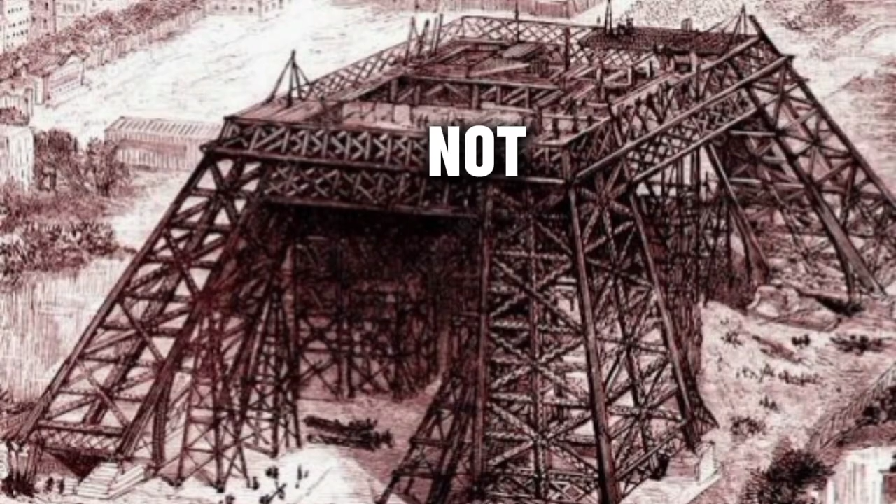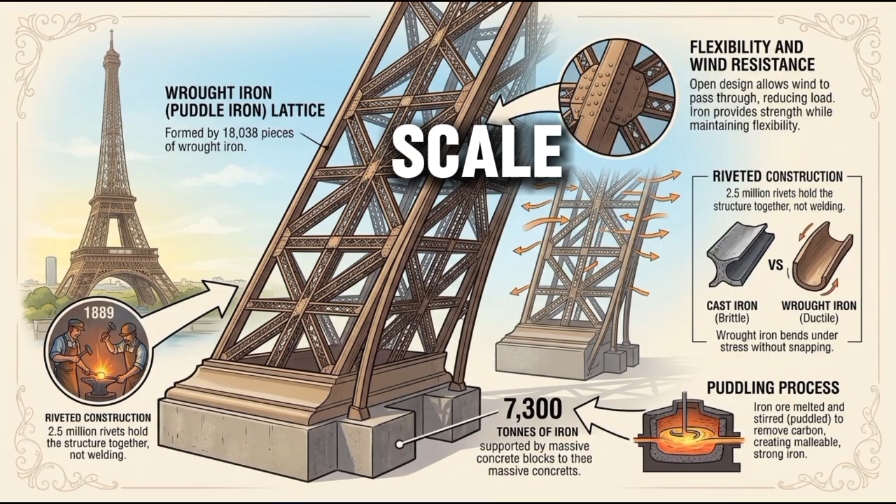On February 19, 2024, the Eiffel Tower closed its gates in the middle of Paris, not because the wind was too strong, not because an elevator had failed, and not because the structure itself had suddenly become unsafe. Employees were on strike, raising concerns about the tower's maintenance and the scale of investment needed to preserve it. Reports at the time pointed to visible rust and a renovation program worth hundreds of millions of euros. The tower reopened 6 days later.

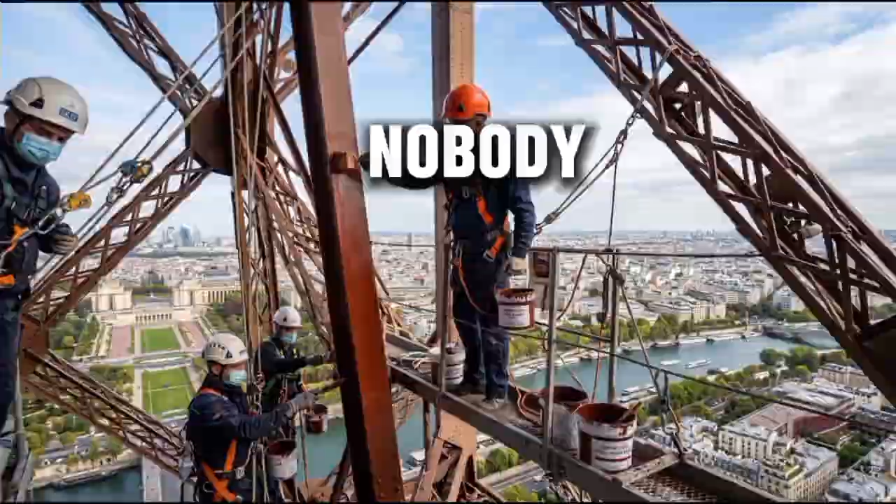Nobody was hurt. But the argument exposed something that photographs never show. The Eiffel Tower is protected by paint, inspection, and constant repair. Remove that cycle, and the iron beneath is vulnerable to corrosion. This is the Eiffel Tower. And here's what nobody tells you about how it's still standing.

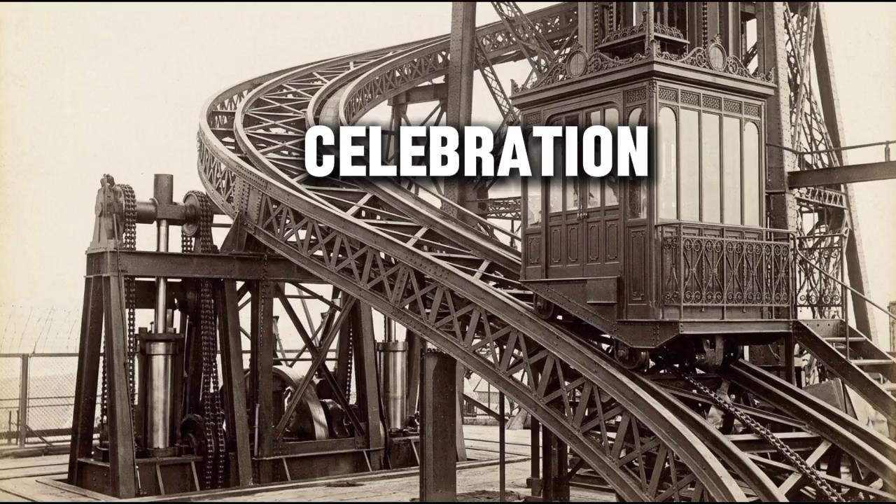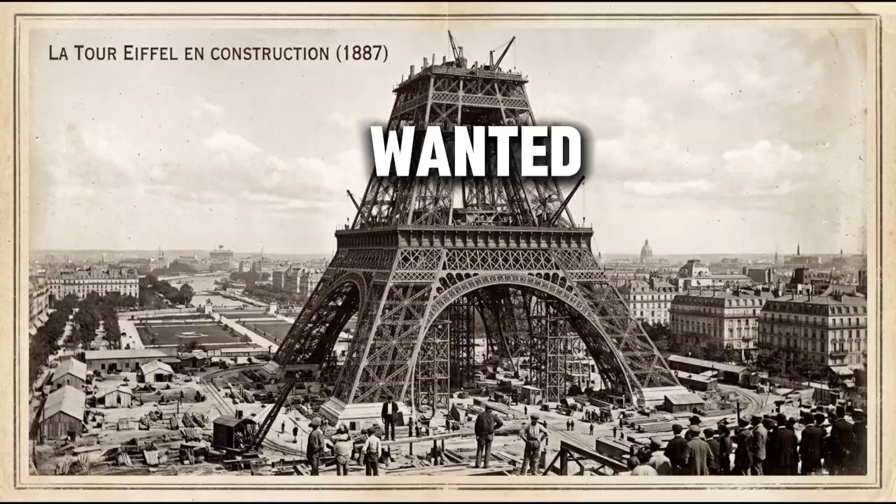The reason this structure exists begins with a celebration. Paris was preparing for the Exposition Universelle of 1889, a world's fair designed to mark the centenary of the French Revolution and demonstrate France's industrial strength. The city wanted an entrance that would dominate the exhibition and make a very specific statement to the rest of the world. France could build bigger.

The project was awarded to Gustave Eiffel and his company, with the design work involving engineers Maurice Koechlin and Émile Nouguier and architect Stephen Sauvestre. The brief was simple to describe and difficult to execute. Build a 300-meter iron tower on the Champ de Mars. The agreement signed in January 1887 gave Eiffel the right to construct and operate the tower, with a government subsidy of 1.5 million francs toward an estimated cost of 6.5 million francs.

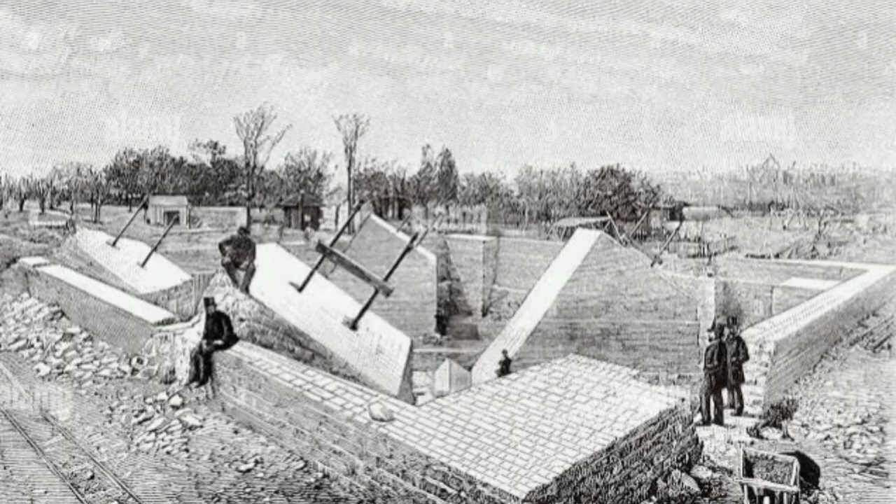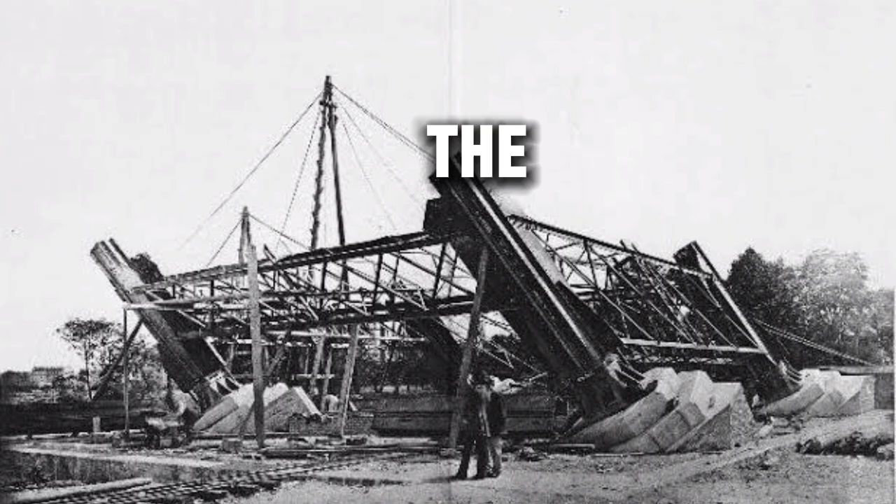The tower was controversial before the first major pieces were assembled. A group of prominent artists and intellectuals signed an open letter objecting to the project, arguing that the proposed structure would dominate the historic character of Paris. But construction continued. Work began on January 28, 1887. Just over 2 years later, the tower was ready. On March 31, 1889, Gustave Eiffel climbed to the top and raised the French flag. The structure that had been criticized as temporary was suddenly the tallest man-made structure in the world.

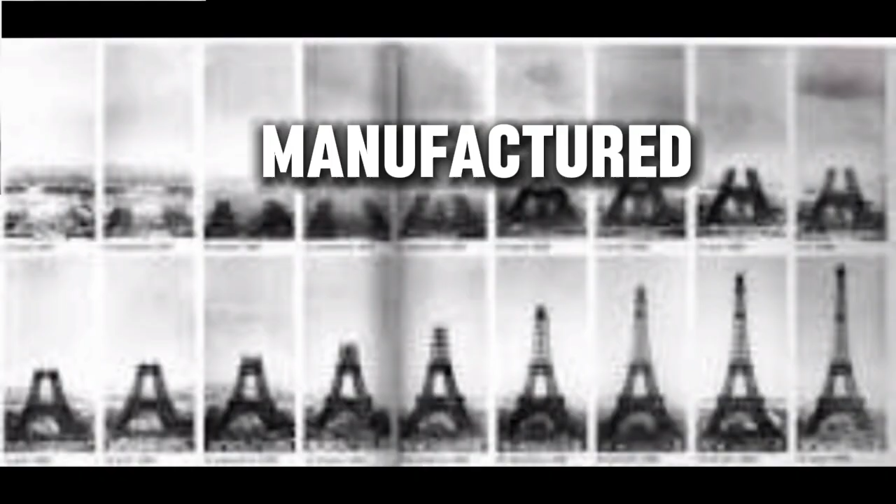And the engineering behind it was genuinely impressive. The Eiffel Tower contains 18,038 metallic parts held together by approximately 2.5 million rivets. Around 7,300 tons of iron make up the structure itself, while thousands more tons are involved in the total weight of the monument and its equipment. The tower was assembled from prefabricated components manufactured with extraordinary precision.

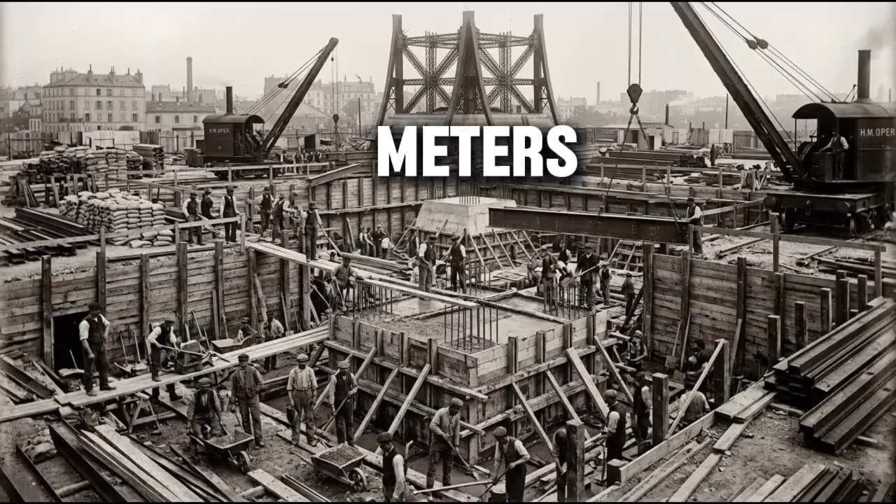Around 5,300 workshop drawings were produced. 50 engineers and designers were involved in the design process. At the factory in Levallois-Perret, around 150 workers prepared the pieces. At the construction site, between 150 and 300 workers assembled them. The final tower reached approximately 300 meters at completion. Today, with antennas, it stands at roughly 330 meters.

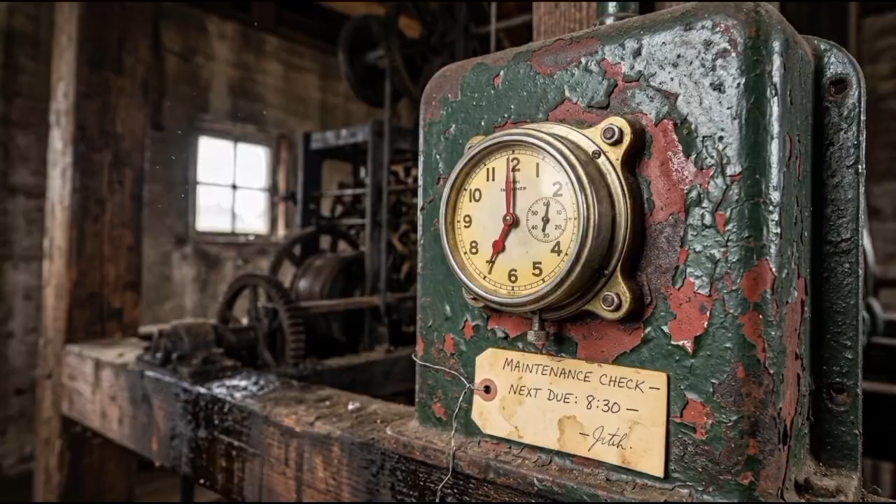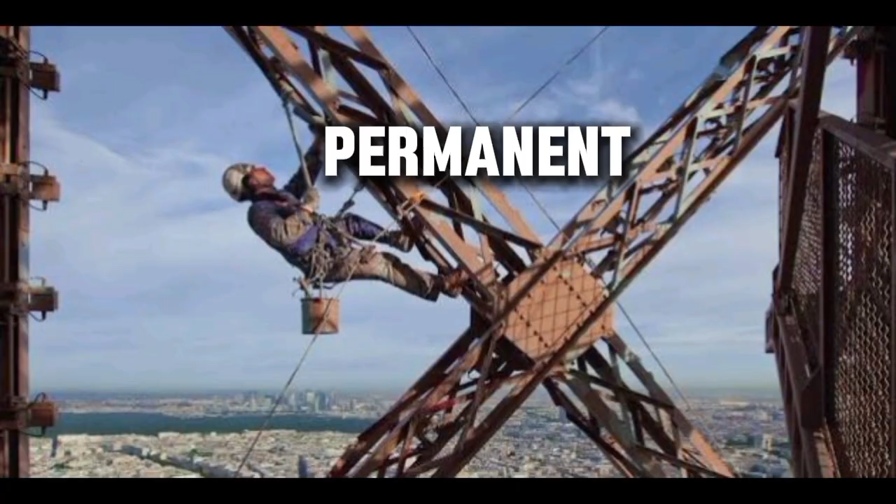It became a landmark. Then a radio tower. Then a television and communications structure. Then one of the most visited paid monuments in the world. The temporary exhibition structure became permanent. And then the engineers started doing the math. Because iron has one basic weakness.

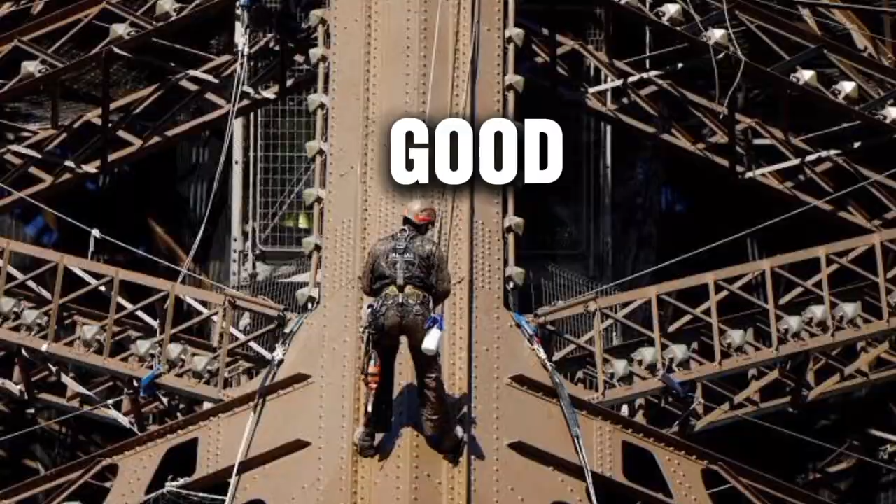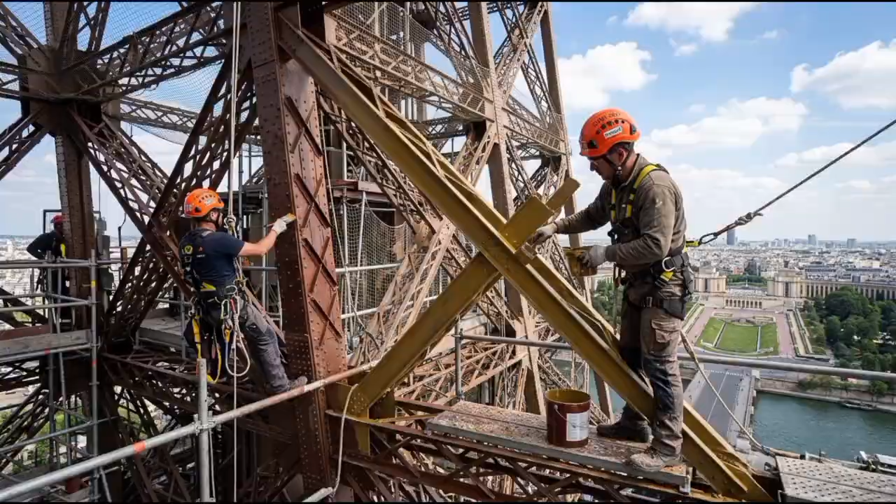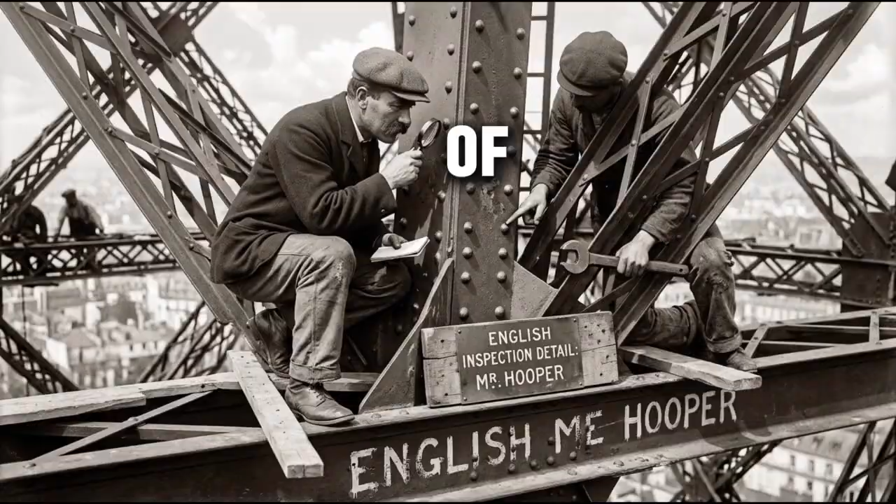It rusts. In a normal building, paint is usually considered a finish. You apply it because you want the walls or metalwork to look good, and eventually you repaint because the surface looks tired. On the Eiffel Tower, that assumption doesn't work. The paint is part of the preservation system. Let's talk about what happens structurally when you leave exposed iron in an environment containing oxygen and moisture. Corrosion is the gradual chemical deterioration of a metal through reactions with its surroundings, and on a structure like the Eiffel Tower, the protective coating is the first line of defense.

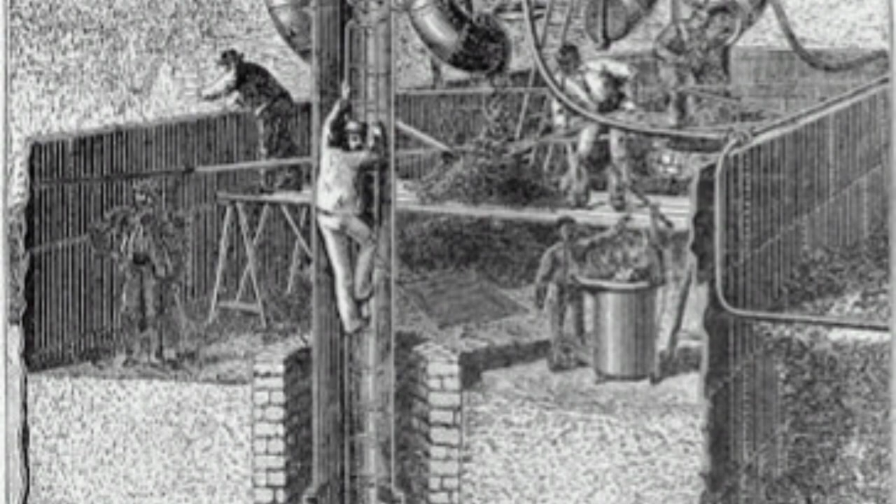Water reaches the surface. Oxygen reacts with the iron. Rust forms. The metal begins to deteriorate. And if corrosion becomes severe enough, it can reduce the amount of metal available to carry structural loads. That doesn't mean the Eiffel Tower is about to collapse. There is no evidence supporting that conclusion.

In fact, the tower's official maintenance philosophy is based on the opposite principle: keep the iron protected, inspect it regularly, repair damaged areas, and repaint the structure before corrosion becomes a serious structural problem. Here's the thing about the Eiffel Tower that every conservation engineer knows.

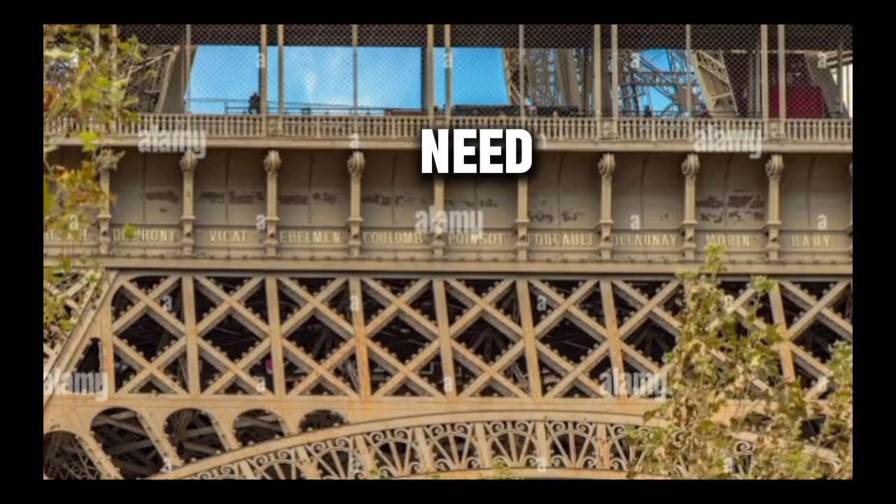The tower doesn't need to be preserved once. It needs to be preserved forever. That changes the entire meaning of maintenance. The structure was built from puddled iron, a 19th-century material that is different from the modern structural steel used in most skyscrapers today. Its open lattice geometry also gives it an advantage. Air can move around the metal. Water doesn't remain trapped inside solid walls in the same way it might in an enclosed structure.

But the tower is exposed. Rain, wind, pollution, temperature changes, birds, human activity. Every day, the same basic chemical process is waiting for the paint to fail. And that means the engineers designed a solution that sounds almost too ordinary for one of the world's most famous buildings. They paint it. Again. And again. The Eiffel Tower has historically been repainted roughly every 7 years on average.

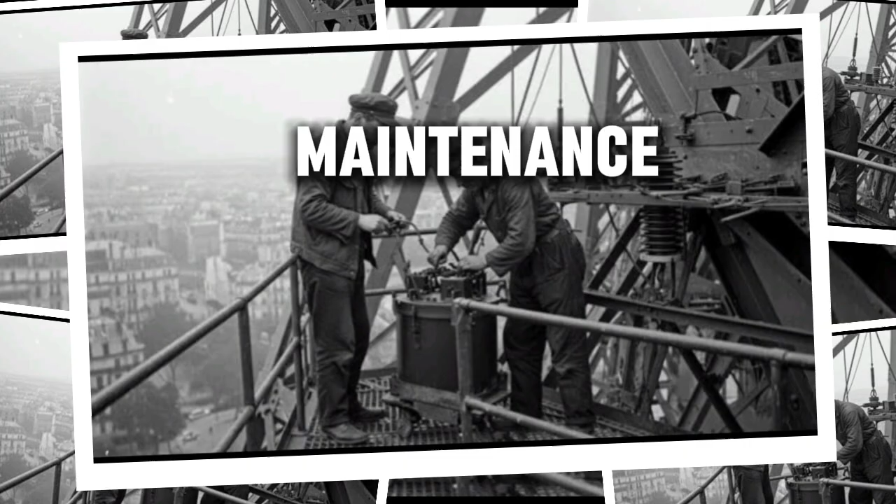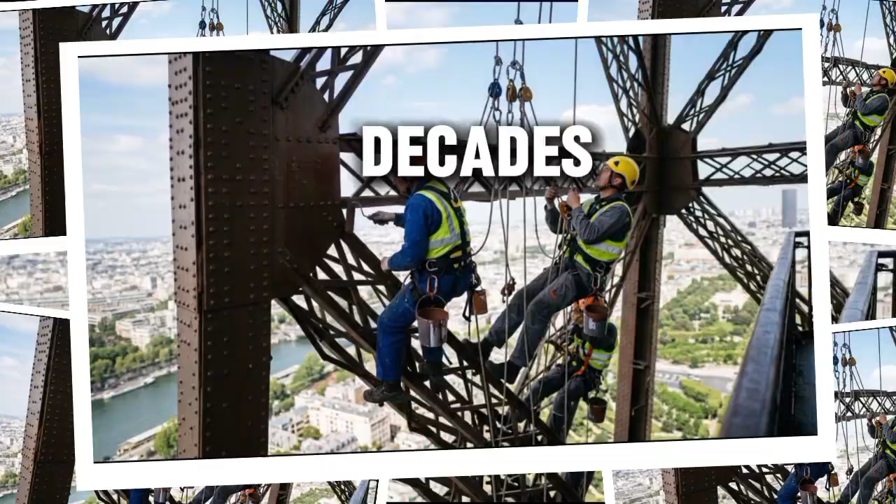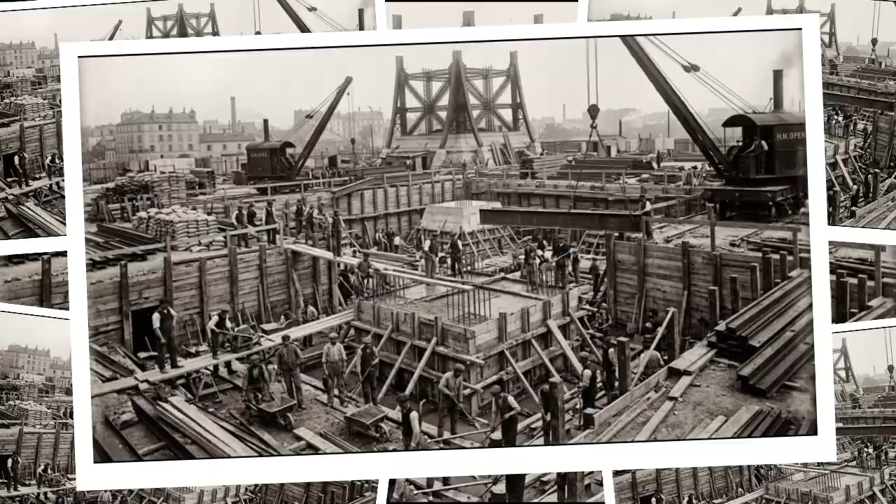That maintenance cycle is closely associated with Gustave Eiffel's own recommendations. The tower has been repainted many times since 1892, with its color changing through different shades over the decades. But painting a 330-meter iron monument isn't exactly like repainting your house. The work is performed at height. Large areas have to be inspected. Old coatings may have to be removed. Surfaces must be prepared. Corroded sections must be treated. New protective coatings are applied.

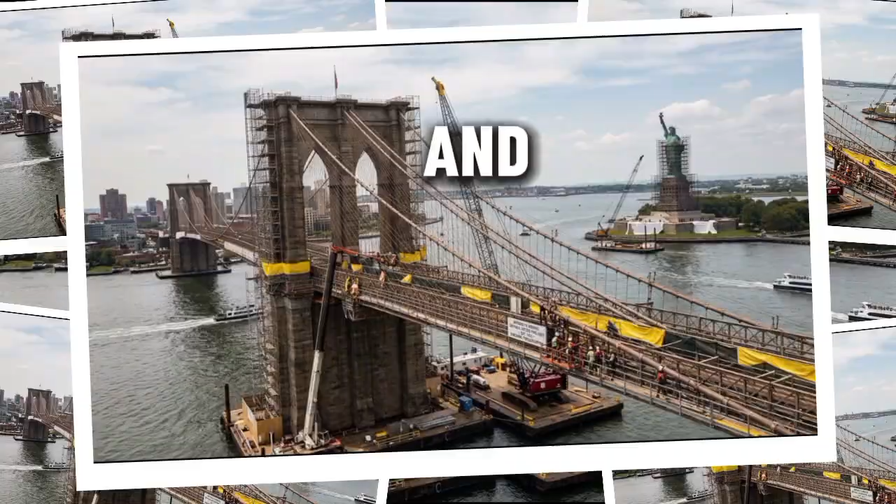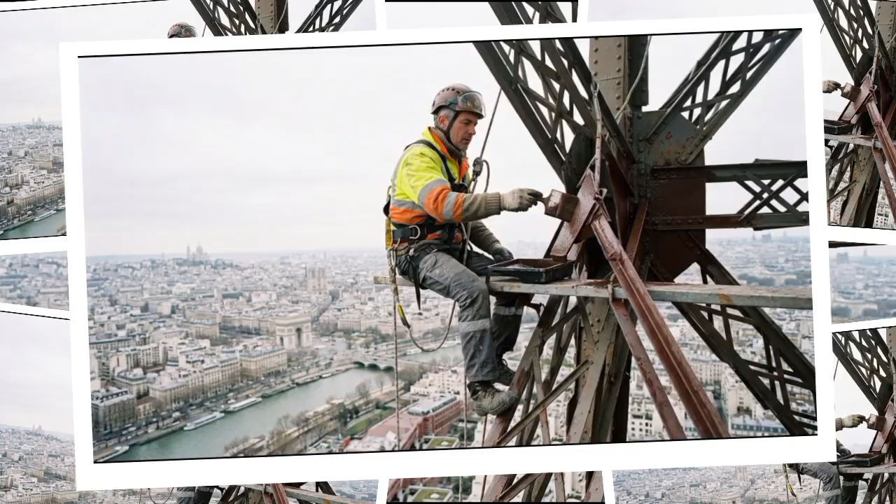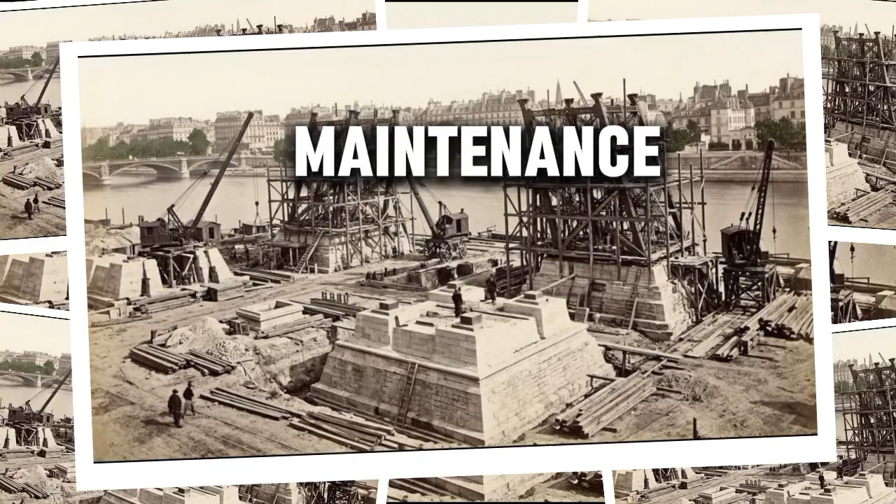And weather conditions matter. During the tower's 20th painting campaign, which began in 2019, workers encountered sections carrying as many as 19 historic layers of paint. Think about what that means for a moment. The Eiffel Tower is not simply one color. It is a physical archive. Under the current coating are decades of previous maintenance campaigns, each one leaving another layer between modern Paris and the iron assembled in the 19th century.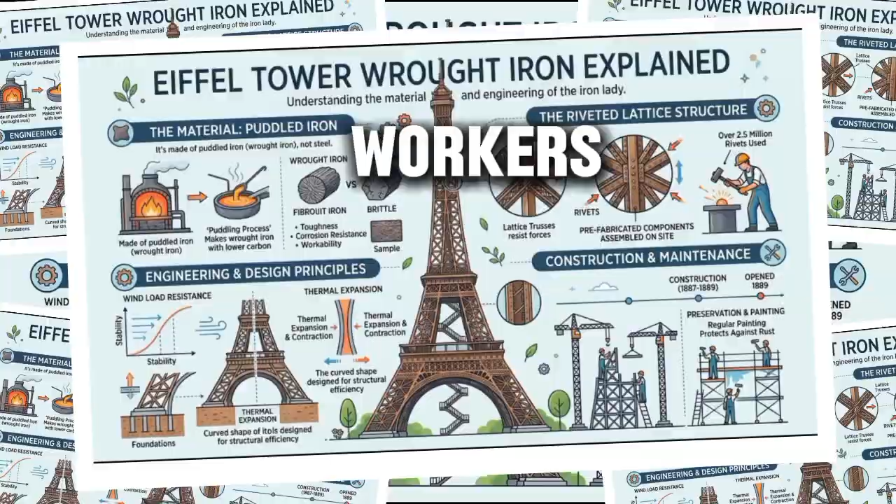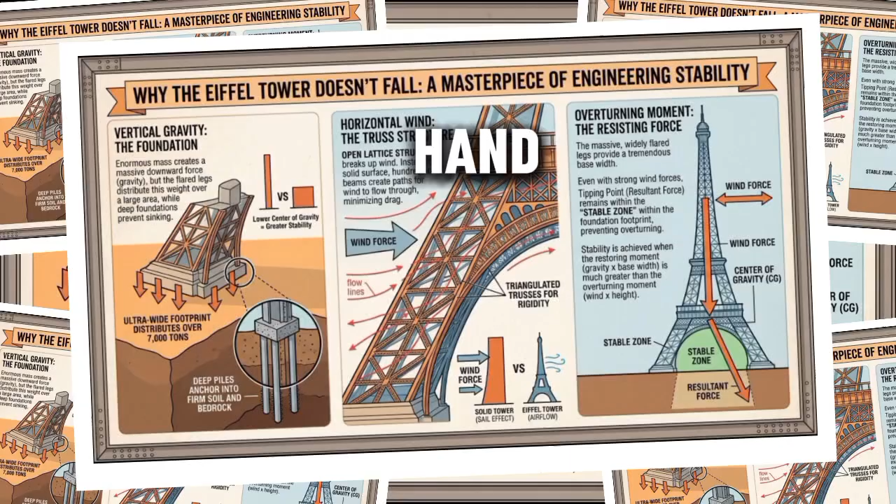The 20th campaign was particularly complicated because of the scale of preparation required and the need to work around the tower's continuing operation as a tourist attraction. Workers used brushes and rope access techniques. They moved through the structure while visitors stood below them. A painter could be suspended hundreds of feet above Paris, applying a protective coating by hand to iron manufactured more than a century earlier. That part doesn't make it into the architecture magazines.

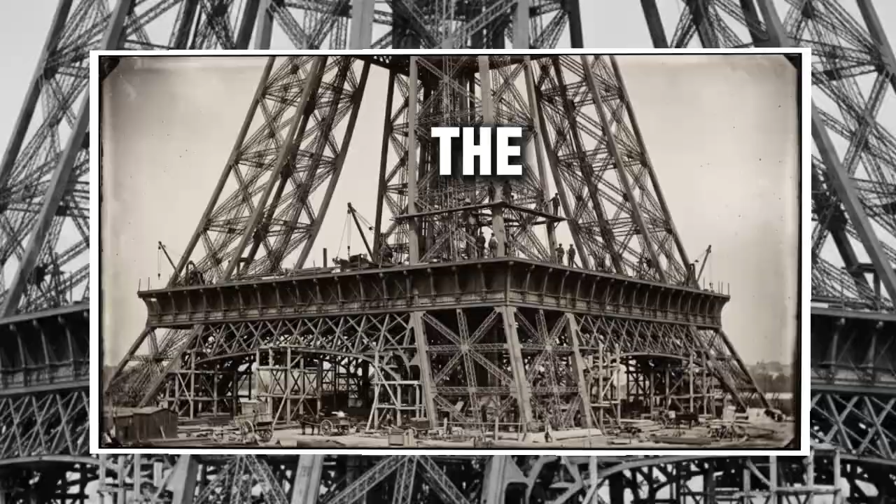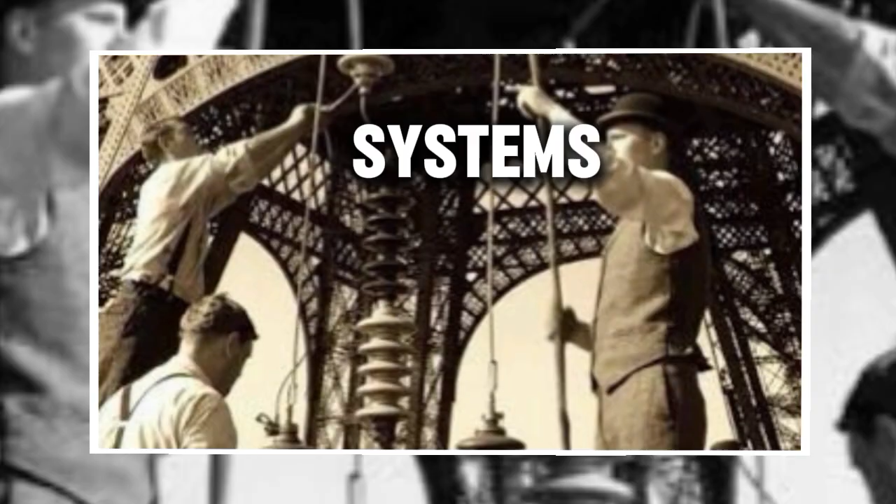But here's something about this building that nobody ever explains. The paint isn't the only thing that has to keep working. The elevators have to work. The restaurants have to work. The stairs have to work. The ticketing systems have to work. The electrical systems have to work. And all of those modern systems have to coexist with a structure designed in the 19th century.

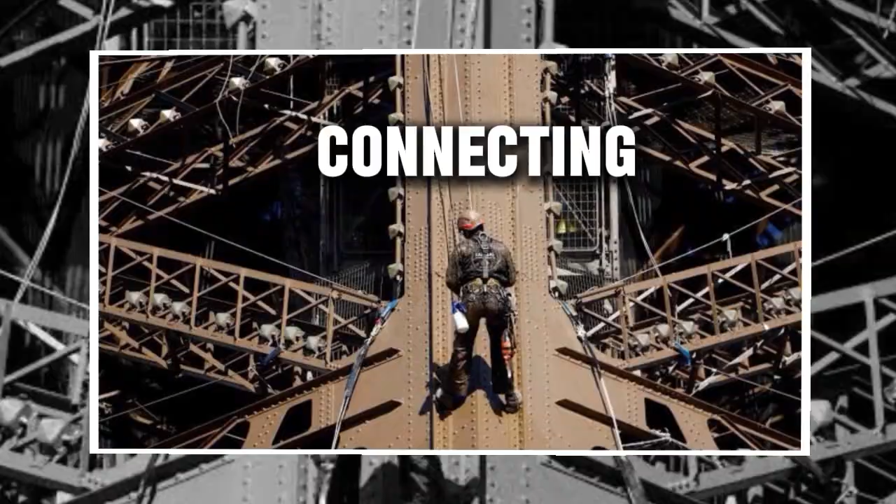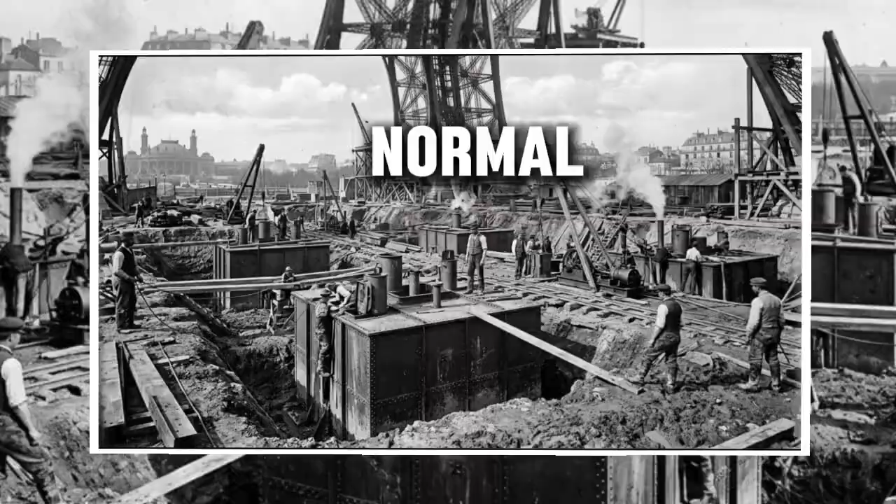The tower's elevators are particularly important because millions of visitors depend on them. The lift systems have been repeatedly modernized and maintained, including major work on the North Pillar elevator and other systems connecting visitors to the higher levels. The structure also moves. All tall buildings move. The Eiffel Tower responds to wind. Sunlight heats the iron. Different sections expand at different rates. This produces small movements that are normal and expected. Not slightly. Not as a design flourish. The entire structure responds to its environment.

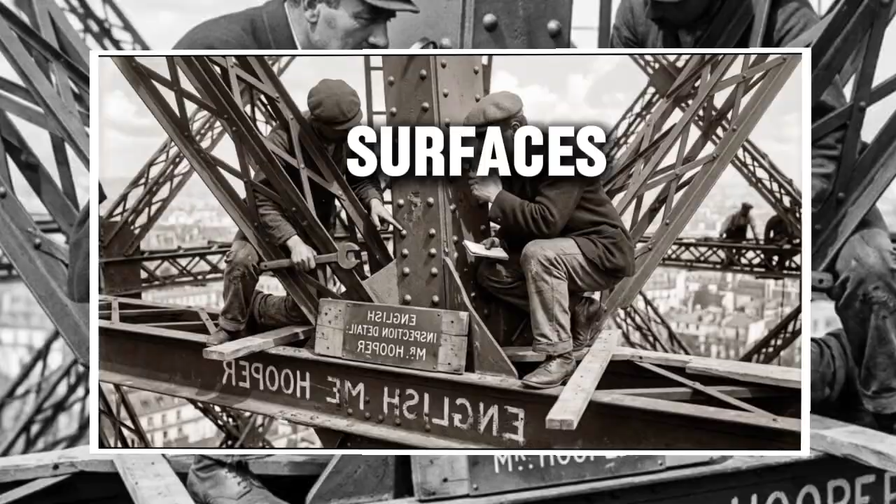But here's the detail nobody surfaces. A building that moves is a building whose maintenance has to account for movement. Connections must remain sound. Paint must remain attached. Inspection records have to be compared over time. And when you are dealing with a structure that has been standing since 1889, the problem is no longer simply whether the engineering was good enough. It is whether the maintenance system can continue for another century.

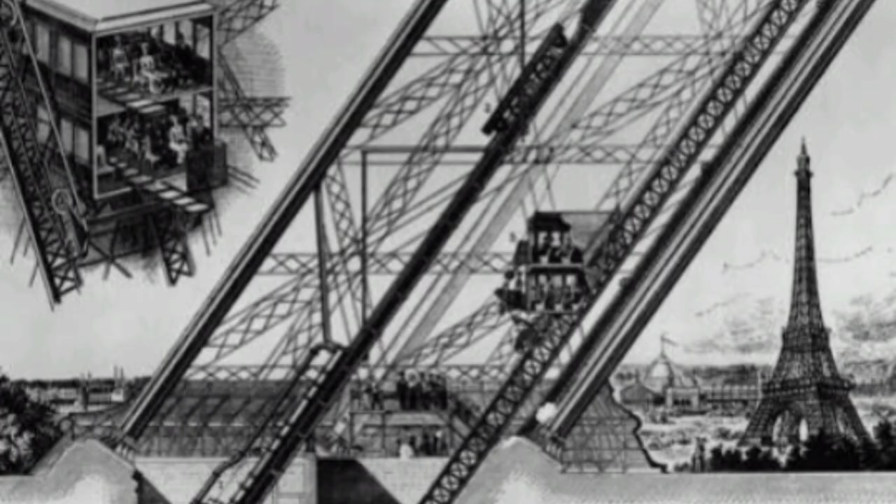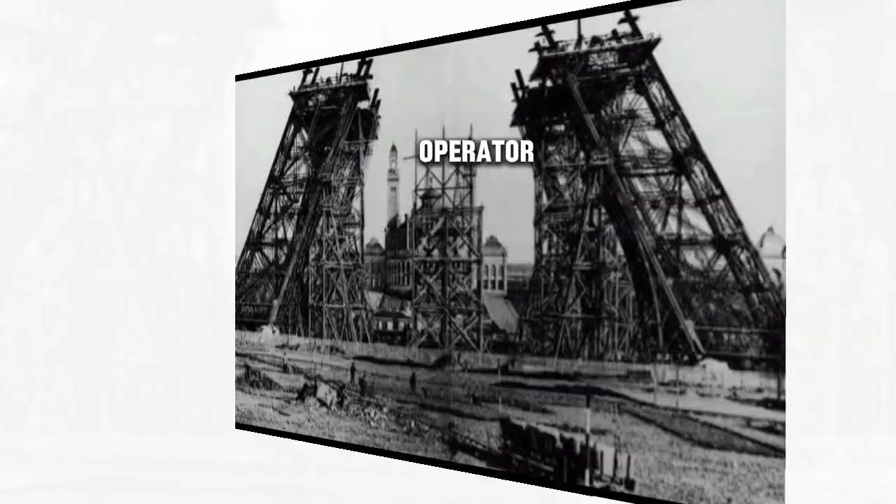Then came February 2024. The Eiffel Tower closed for 6 days during a strike by employees. Reports from the Associated Press described concerns over the tower's maintenance, including visible rust, while the operator had committed to an investment program of approximately €380 million through 2031. The event did not become a structural disaster. Nobody was injured. The tower reopened. But within 6 days, the conversation had moved from tourism to preservation.

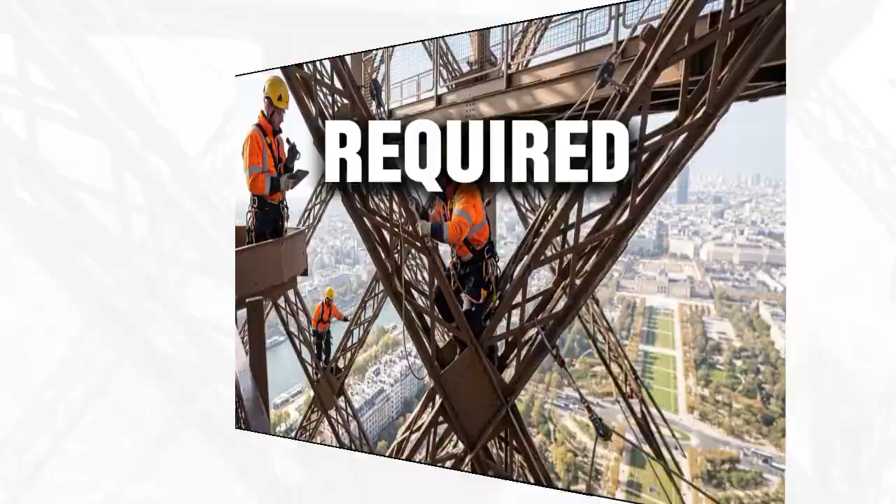Within the next few years, hundreds of millions of euros would be required for renovation and maintenance. The problem wasn't that the Eiffel Tower suddenly stopped working. The problem was that keeping it working had become a very expensive, permanent responsibility. And here's the question that sits beneath all of this.

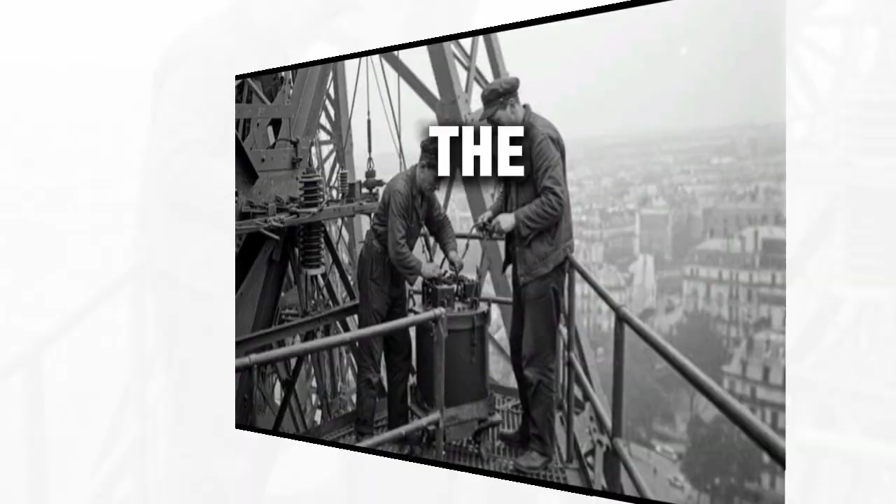What happens when maintenance itself becomes the greatest engineering challenge? Other famous structures have faced versions of the same problem. The Golden Gate Bridge in San Francisco must deal with corrosion from its marine environment and requires continuous inspection and painting. The Statue of Liberty has undergone major restoration projects to preserve its copper exterior and internal structure. The Brooklyn Bridge has survived through repeated rehabilitation and repair.

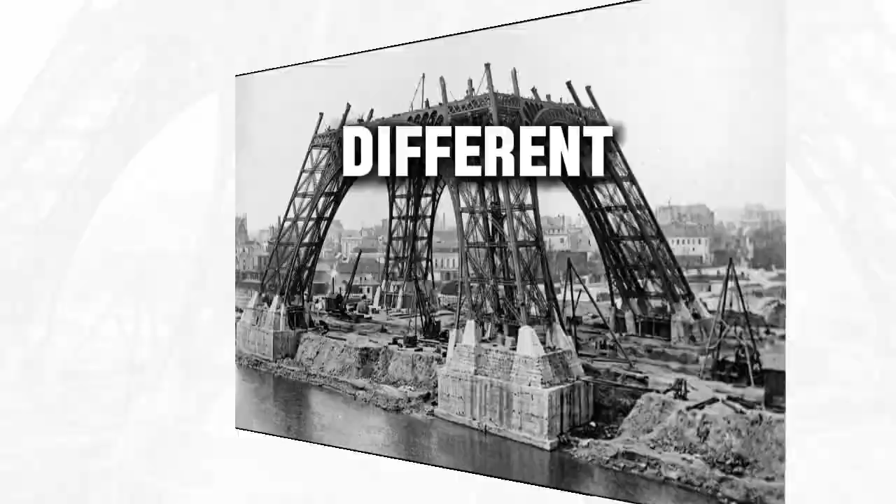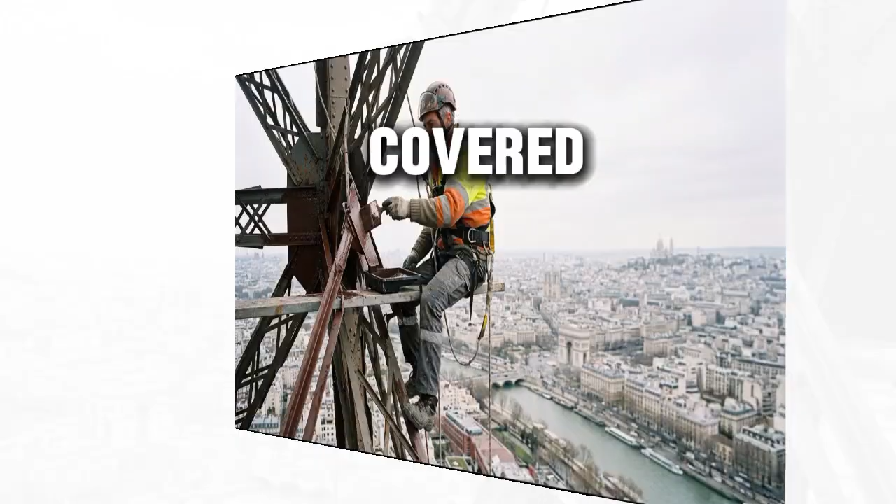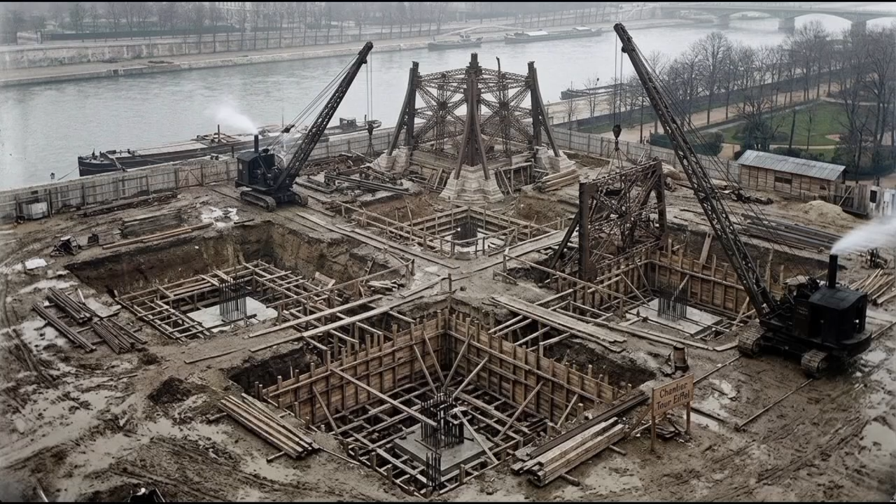The Forth Bridge in Scotland, another enormous metal structure, became famous for the constant maintenance associated with protecting its steelwork. Each structure survived differently. Each had different materials, different environments, different engineering solutions. Here is the fundamental difference between the Eiffel Tower and every other historic iron landmark we've covered. The Eiffel Tower's survival depends on maintenance being treated as part of the building itself. Not an emergency response. Not a once-in-a-century restoration. A cycle. Inspect. Repair. Paint. Repeat. For how long? The answer is not written down.

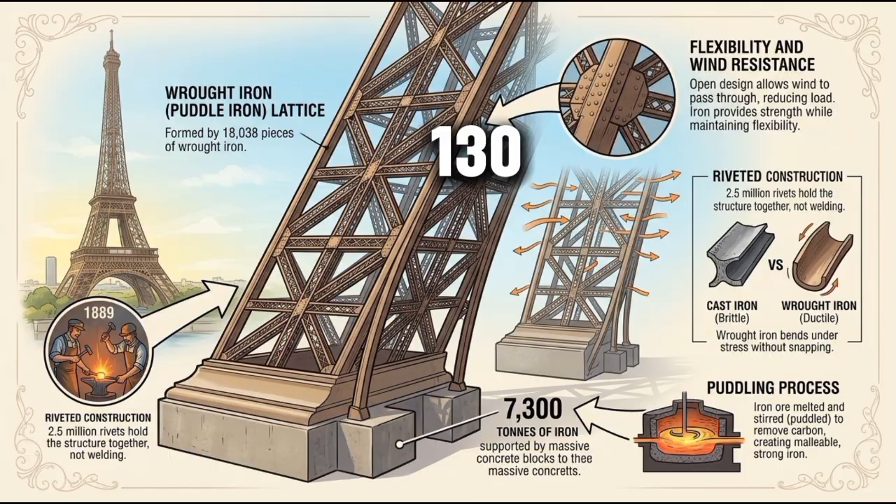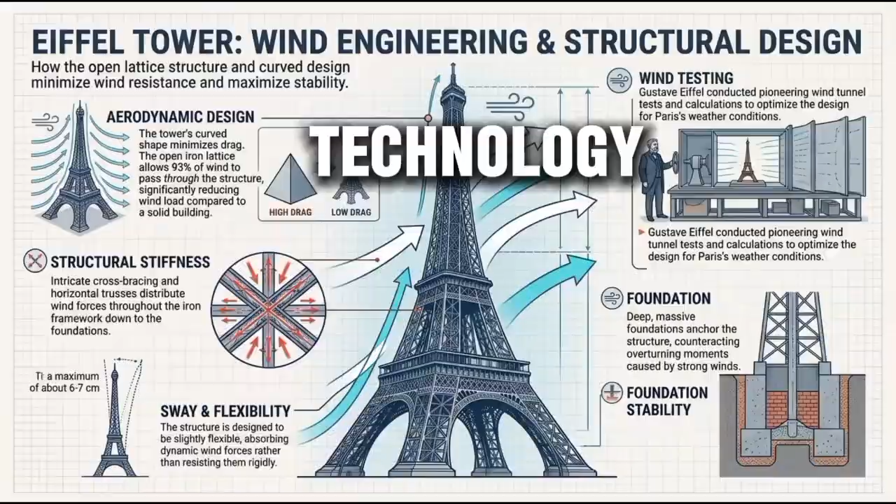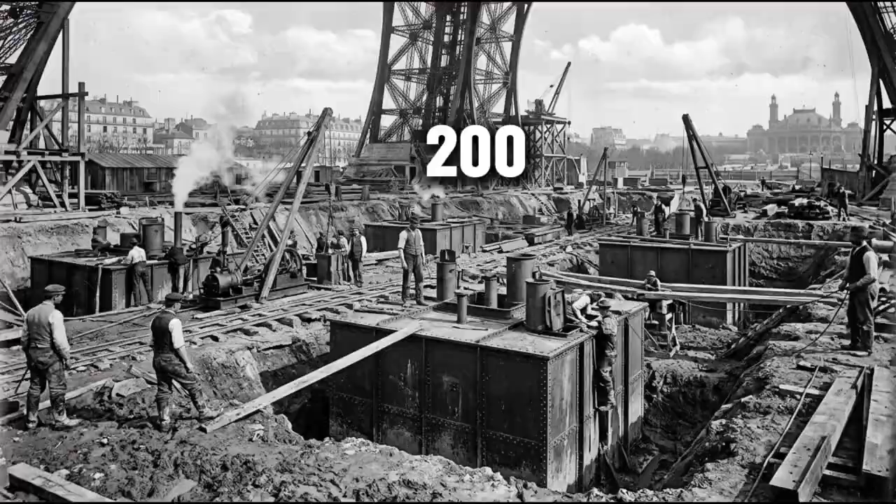And that brings us to the uncomfortable part. The Eiffel Tower is more than 130 years old. Its engineers know how the structure behaves today. They have historical records. They have inspection programs. They have modern technology. But they don't have a second Eiffel Tower from 1889 that they can use as a perfect comparison. There is no historical data for what a 330-meter iron landmark looks like at 200 years, because no identical 330-meter iron landmark is 200 years old. This is the first. It is the only one.

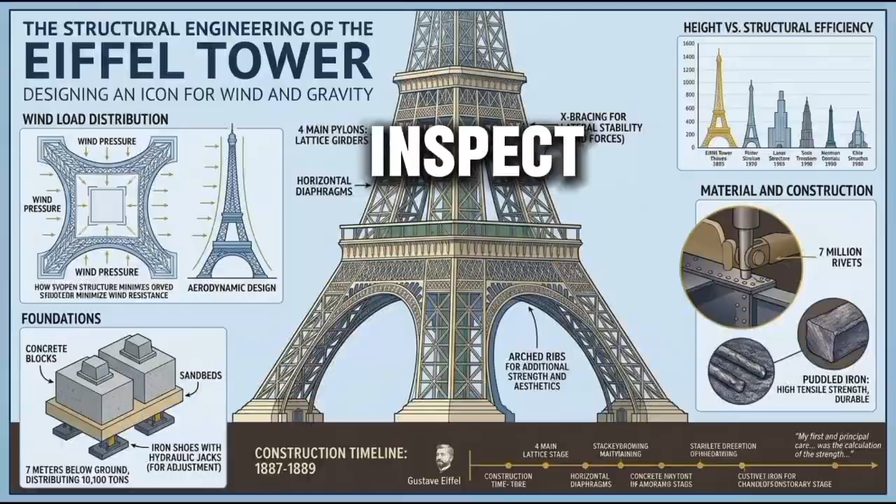When engineers inspect the tower in 2030, 2040, or 2050, they won't be looking at a finished experiment. They'll be adding another line to the experiment. They will compare measurements. They will track corrosion. They will examine joints. They will monitor coatings. They will decide whether the current maintenance cycle remains sufficient. The engineers who work on the Eiffel Tower in 2050 will inherit the decisions being made today. And the engineers working on it in 2100 will inherit theirs.

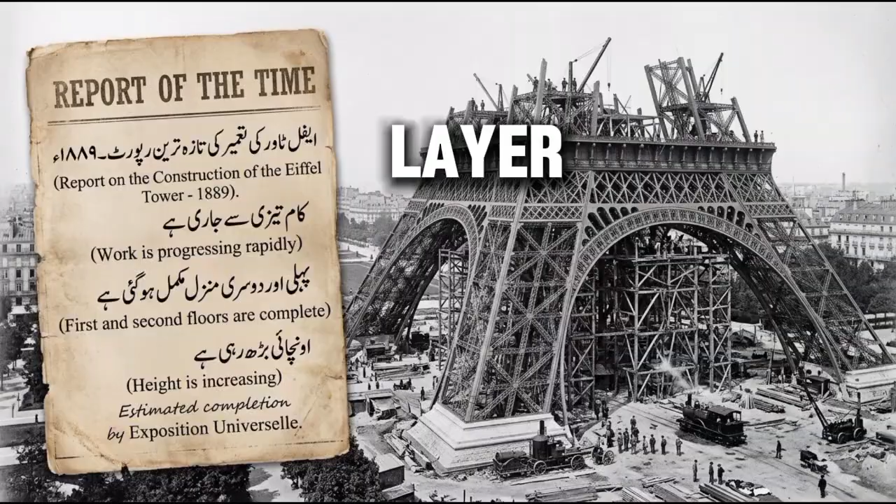The tower's future is therefore not controlled by one dramatic moment. It is controlled by thousands of ordinary decisions. One inspection. One repaired connection. One layer of primer. One section of paint. Then another. Honestly, that's a little unsettling. Not because the tower is unsafe. Because it reminds you how much of the world's most permanent-looking architecture is actually temporary work being repeated forever.

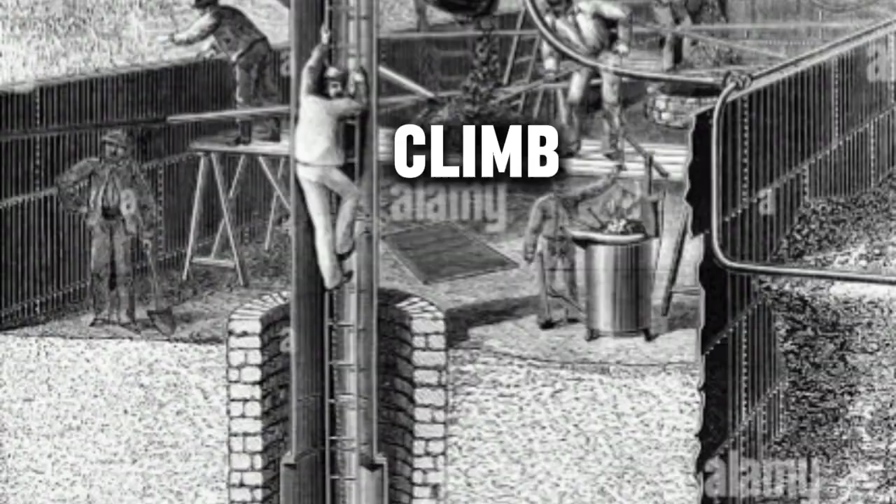And yet, inside the tower, almost nobody thinks about it. Millions of visitors arrive every year. They queue beneath the iron legs. They hear the elevators moving. They feel the vibration as the doors close. They climb stairs where the metal handrail is cold against their palm. They look through the lattice and see Paris spread beneath them. In 2023, the tower welcomed nearly 6 million visitors as tourism recovered from the pandemic years. 6 million people standing inside a structure whose most important protection is something they can barely see.

A thin coating. Paint. A guest might buy a coffee at the summit. A child might press their forehead against a viewing window. Someone might take a photograph of the Seine while a maintenance worker is somewhere above them, inspecting a connection that most visitors will never notice. The tower feels permanent. That is the illusion. The reality is more complicated. Its survival is not guaranteed by age. It is guaranteed by attention.

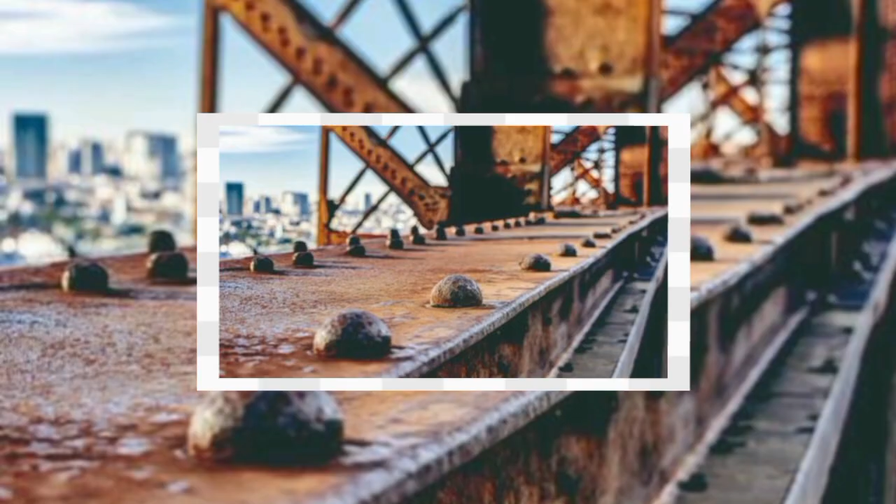By money. By inspection. By people willing to climb into the structure and keep doing work that will never make the front page. None of them are thinking about rust. They are thinking about tomorrow's shift. And perhaps that's how a monument survives. Not by being indestructible. By being maintained.

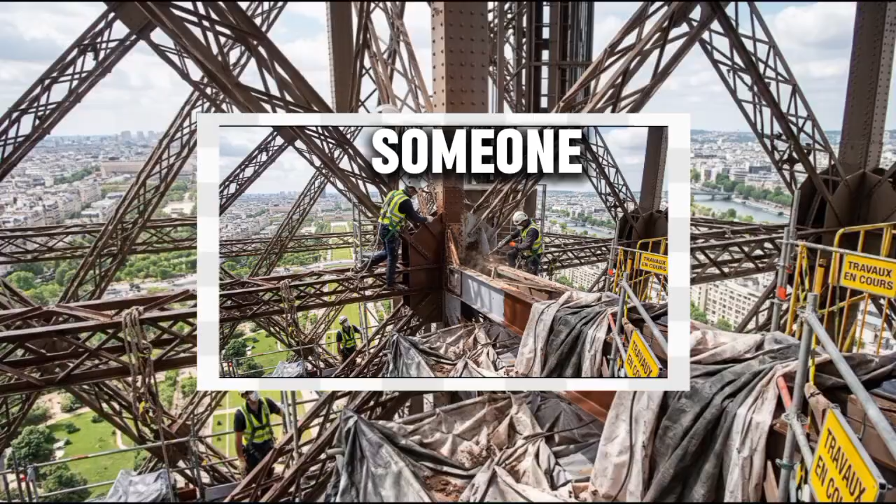Right now, someone is standing at the top of the Eiffel Tower, looking across Paris, unaware that the monument beneath them depends on a maintenance cycle that began more than a century ago. The tower isn't frozen in time. It is being continuously renewed. One layer at a time. The unasked question is how long that cycle can continue.